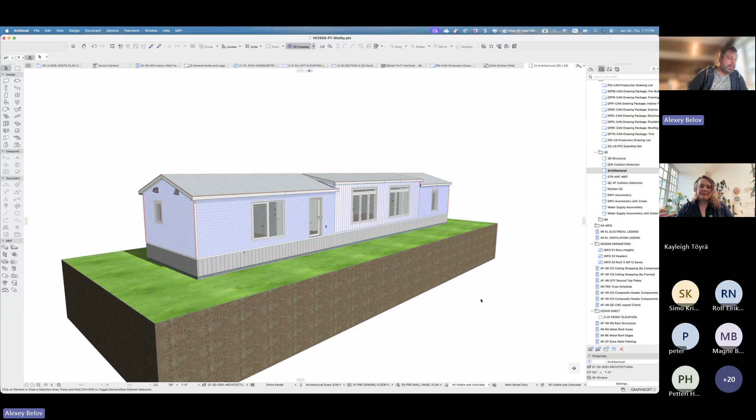And what to do, how to assign this information - of course we have layers, and at that time we were using layers. It was really terrible because even if you have only 2 boxes, you already need double the number of layers for management, because you have studs for model A, studs for model B, and so on. So we found another solution, and our solution is design options.

For example, this wall has an ID EW02. This wall has an ID EW03, exterior wall. This wall is also EW02, and this one EW02. So all of these have the same IDs. How can we distinguish them, and how can we get information?

Here we are coming to our global MOD, full MOD ID. This expression takes the model character - it just cuts the first 4 characters and assigns a letter, A or B - and it takes the story number. That's why this wall is B3 - it belongs to model B, which is on the 3rd floor. This wall is B2, definitely. This one is A3, I guess - correct, A3.

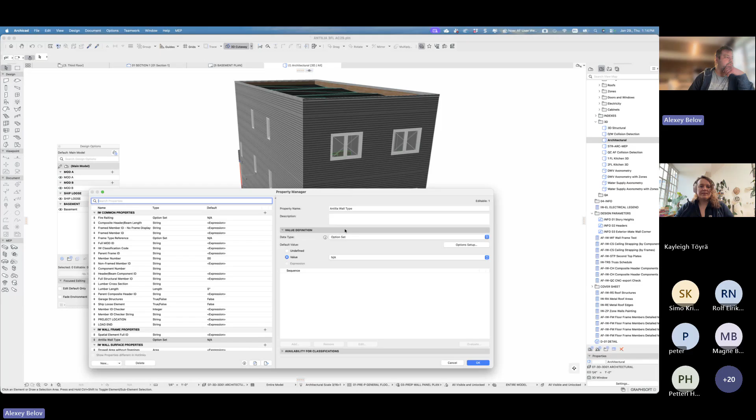And here's our first example of properties, as I told you, we have full MOD ID. So how does it work? Right now we have only one property for every type of house.

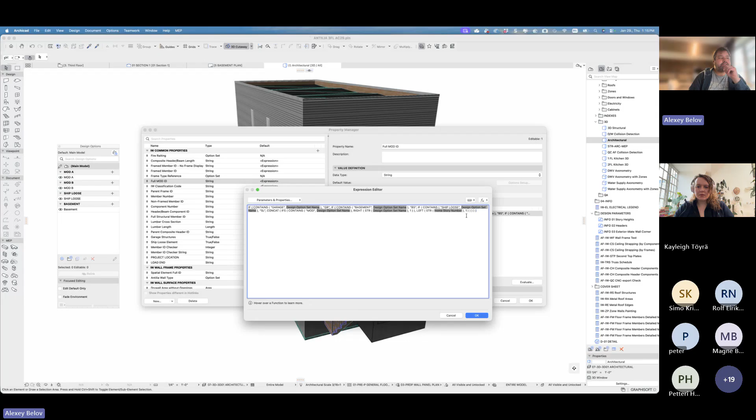If this design option contains a garage, it assigns GR. If it's a basement, it assigns BS. If it's ship loose - for example, in this house we have these parapet walls which are ship loose, stairs are ship loose, some exterior elements are also ship loose, we'll go closer to that a bit later. And if it's none of these three - basement, ship loose - then it takes MOD, as I told you, it cuts the first 4 characters, MOD and space, and takes a character. So meaning that for our wall here, we have an element ID.

The problem of element ID I'll discuss a bit later. And here we have this special element, full ID - it's B3EW03, meaning that it takes our full MOD ID, as I just explained how it assigns. Then it adds a dash and adds an element ID.

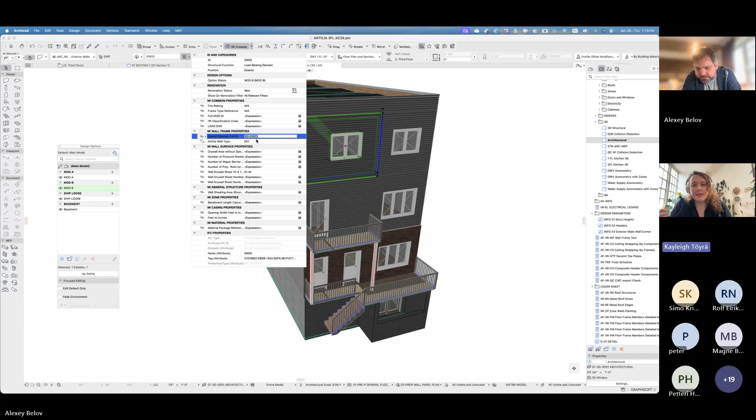We had a quick question or clarification: can you show the single module in Archicad as it is built in the factory, hiding everything else? Sure, of course.

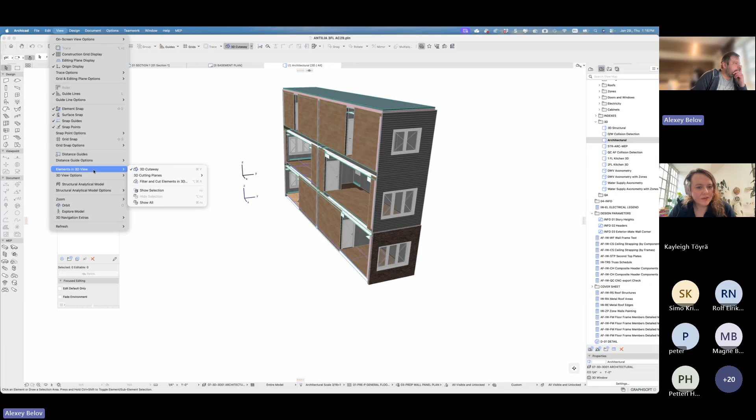That's going to be cool. And of course if you want I can additionally assign - okay, not a problem, give me a second. View elements in 3D view, filter and cut elements. Here we can use a range, for example first to first.

Just please keep in mind that this box looks quite strange for every architect. We've got this project when it was already designed, and this is not a finished project, it's a live project, and it looks quite strange because here we have a party wall. That's why we have to split these two elements. A party wall is sound rated and fire rated, so you should have two different frames, but at the same time we have to deliver it as a single module. So it's a very complicated story, and that's why later we'll talk about a different project, not this one.

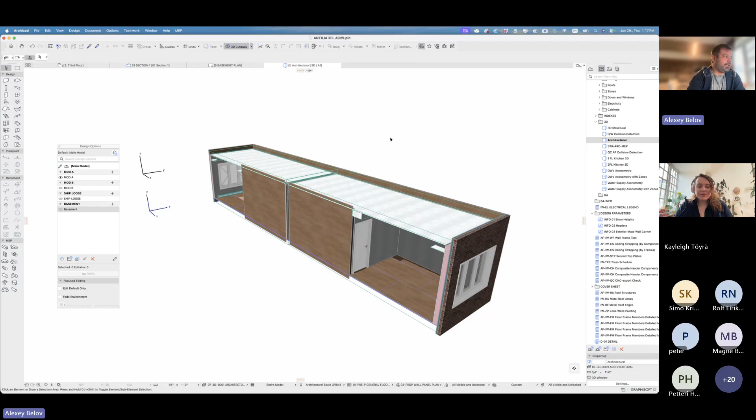But as you can see, yes, you can do that very easily. Let me just go back to architecture. Okay, here we have our elements. And just later in the summary section, you'll see how exactly it works.

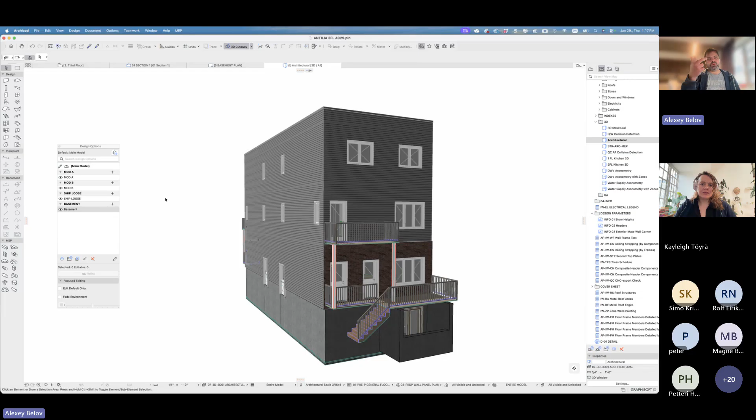So for our walls, we just need our favorites and we need design options, nothing else, because in favorites we already have our categories. Here, categories are not very important - I still believe that it's important, because if you ask me what's more important, a new feature in Archicad to develop a new level of IFC properties, or to add another option for nicer posts in railings - definitely IFC options.

So here comes the properties' magic, because in our ArchiFrame palette, when we start to create any frame based on an element, it can read element ID, element categories, and element properties. You can find this information in the documentation. It was our request to make a more flexible script for that, and it works.

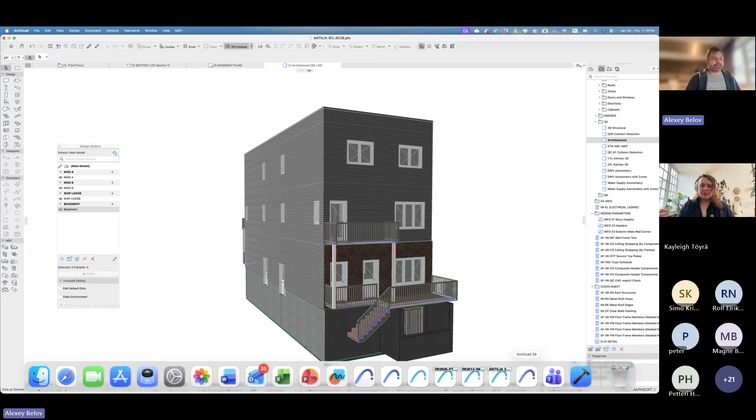So let's just leave this project aside because it doesn't contain any ArchiFrame elements right now - again, it's ongoing, I just wanted to show you how this structure works in the case of Archicad elements, the Archicad model. So the most important thing - our project here. Let's just get rid of our landscape, we don't need that.

And again, as I told you before, here we have wall EW02, and since it's module B, it will be a spatial element ID - it will be B1 EW02. This one will definitely be EW01, B1 EW01. Okay, this brings us to the parent, so-called parent element ID.

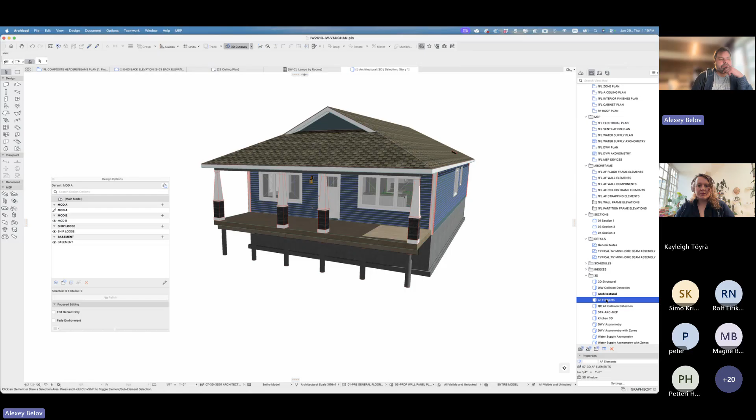Let me switch to ArchiFrame elements. I believe there's no need to explain how to create ArchiFrame elements, everyone knows that. So we have this element created based on an Archicad wall. And here, when we create this element, we have of course this assign IDs button, or give IDs button.

And it reads already the parent Archicad element, because I prefer to use parent element not for Archicad elements but for ArchiFrame elements. And here we have a script. This script has been created by Petteri. This is something really magic, really important thing.

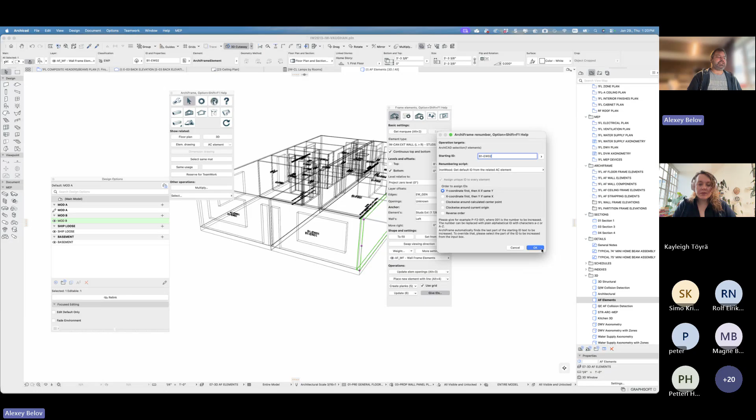It reads our wall information, and moreover, if, for example, I will change this wall ID, let's say that it's 11, and if I just select our ArchiFrame element here, give IDs, we can see that it's already updated, and this way everything inside this wall will be updated. You will see it a bit later.

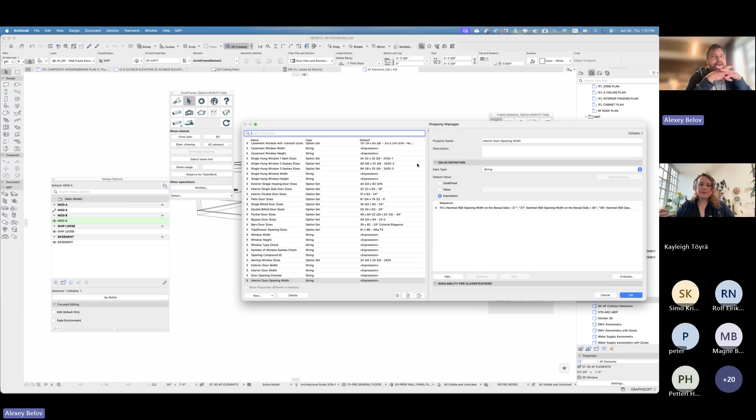Again, going back to our properties, because actually right here we have a very serious problem. Let's try to show. Just a sec. It's a bit complex project.

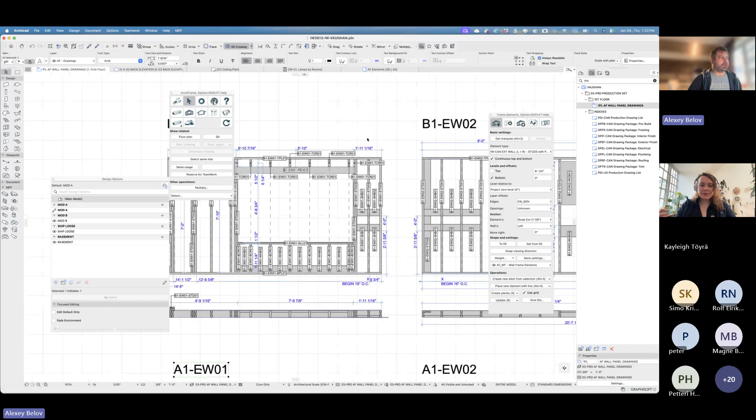So we have our elements, components, and my point, as I told you before, is to have information for every component. And this information should be very flexible, meaning that it should be updated immediately if I have any changes. And here's the problem. As I told you before, Archicad expressions work for every element, meaning that if I have my wall EW01, it's an element ID. And for a stud, I also need an element ID.

And this element ID should be unique, because we have to send it to CNC, and that's the basic rule for CNC management, meaning that you cannot assign an element ID 2 times, because again, Archicad doesn't support these parent ID assignments or spatial element assignments. That sucks. But we have what we have.

And here, what's really important, when Petteri's script works, it assigns these give IDs, it reads depending on the situation, because in mini homes we have only one model, in modular homes we have more than one model. It reads full mod ID. This is A1, B2, F3, and so on, and adds the second part, which is our element ID, EW01, EW02. So you have to type manually this Archicad wall element ID. Then the script comes into play.

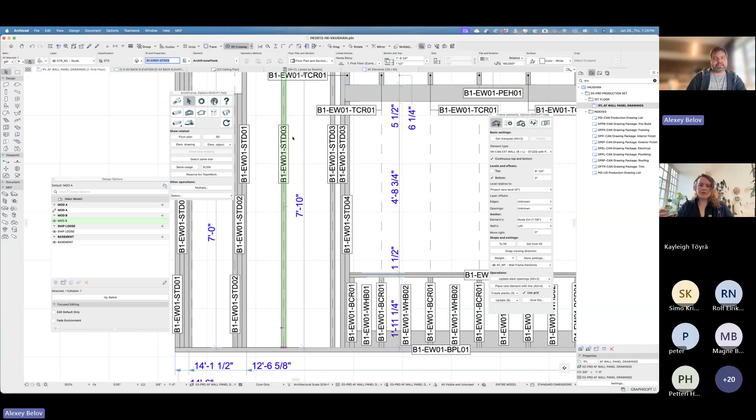Okay, but how can I get this information for my element as an element ID? Properties. In our properties, we have the so-called parent frame ID. How does it work? Again, mini home is only one model. I don't need a full mod ID for mini homes, but I need full mod IDs for modular homes. It checks if style of house is mini, it's project info. So we just type mini in our template.

Then it takes first 4 characters. If it contains a dash, because our ID is A1 dash, and then comes element ID. And take a look. First for mini. In mini, we don't have this part. So it takes EW01 and assigns it as a parent element ID to each stud, to each cripple, to each bottom plate, top plate, and so on. If it contains a dash in element ID, then it takes first 7 characters. 1, 2, 3, 4, 5, 6, 7. And assigns it as a parent.

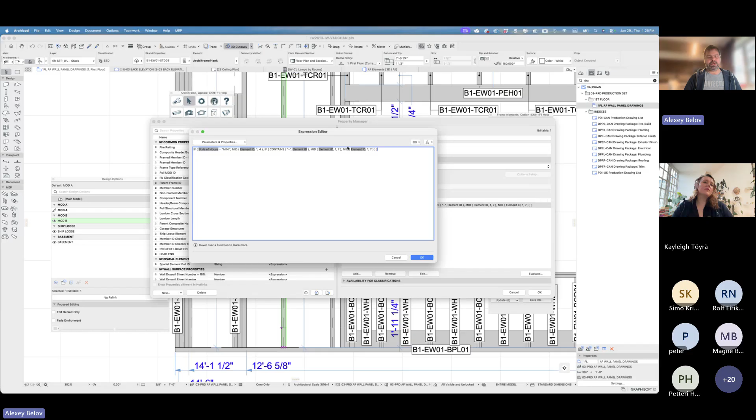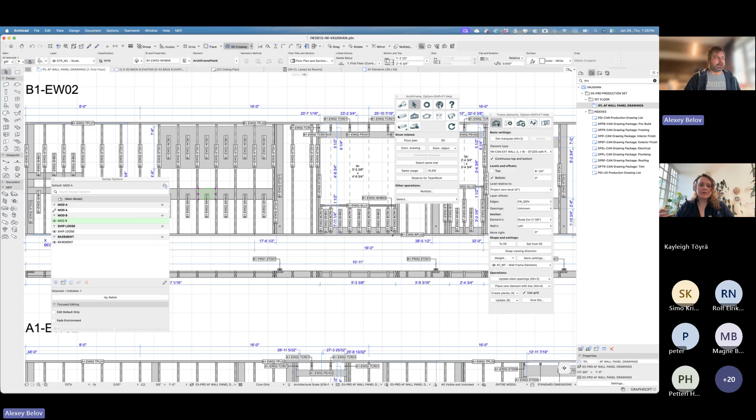This way, my stud, any element, or for example, kitchen blockings, I have to put some blockings in the kitchen behind this. Here we have some shear blockings in another frame. Just a second, we don't need it right now. So here, for example, these reinforcement blockings. Here, these are kitchen cabinet blockings because we have to screw our kitchen cabinets to every block, and so on. For our baseboard heaters, we need blockings.

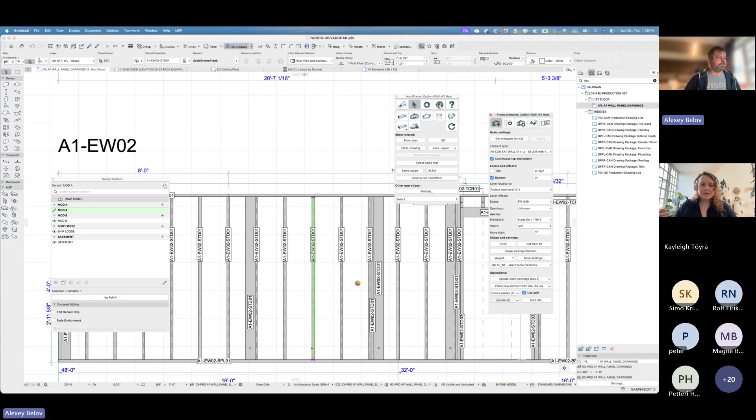And these blockings, again, know where they are. They are in our ArchiFrame element. And this element is EW02. Do you remember I updated our wall to EW11? It was here. I just didn't refresh yet. It was B, not A1. Sorry. Here. Every element has got a new ID. I have to do nothing here.

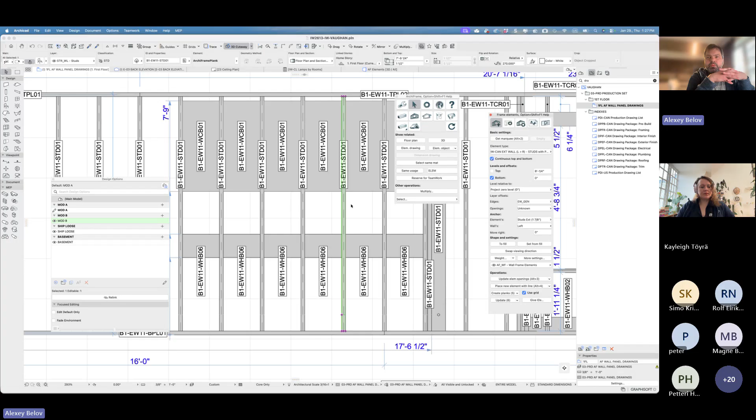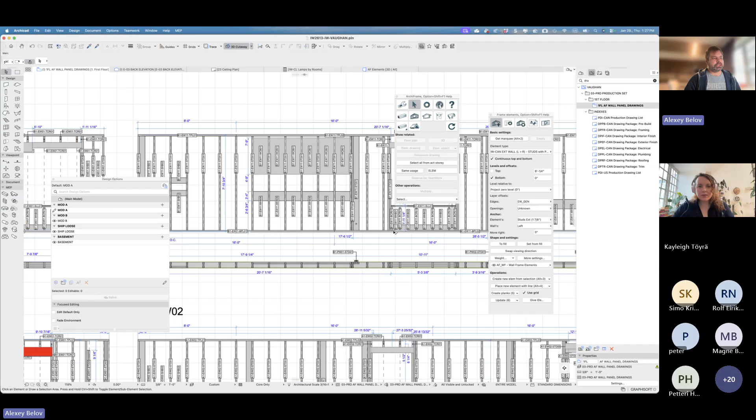Moreover, before we moved to a new facility, we were limited in our wall panels to 16 feet, meaning that this long exterior wall had to be split every 16 feet. That's why we had more than one panel inside one long panel. We still have this option, but we don't use it anymore. Right now, we can just assign bottom plate 01, 02, 03, and so on.

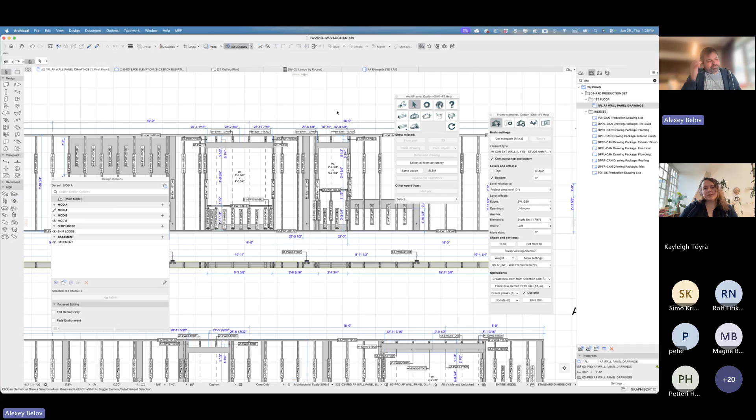But you still have this option just to assign a different element ID, and then you can still have your special, like EW01, 02, 03; they are all inside one ArchiFrame element. It's still possible. Right now we recognize that as an already obsolete function for us, but it was important.

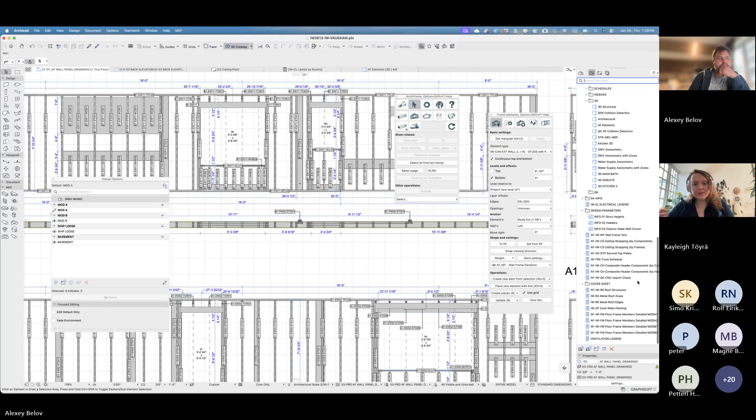Okay, next. As I told you, we have this parent element ID, but we can also have non-framed elements. For the best examples, let's just jump to our structures. You see, rafter fascia, weather blocking, some other elements, second top plate. The second top plate is not a part of my wall. It's a non-framed element, because first we put our elements, then we place it on the top, the second top plate. So, non-framed elements.

That's why we have the so-called full structural member ID. This full structural member ID just checks for different properties: framed member ID, non-framed member ID, which I already explained, like rafter fascia or second top plate, and no frame display.

A good example, again, is this house with only two models. I have only one wall frame, floor frame. I have to save my space, because I don't have much room for my joists in the drawings. I don't need to display my model. In this case, I can just display without the model, so it's a very simple trick with the properties. And header beam component ID.

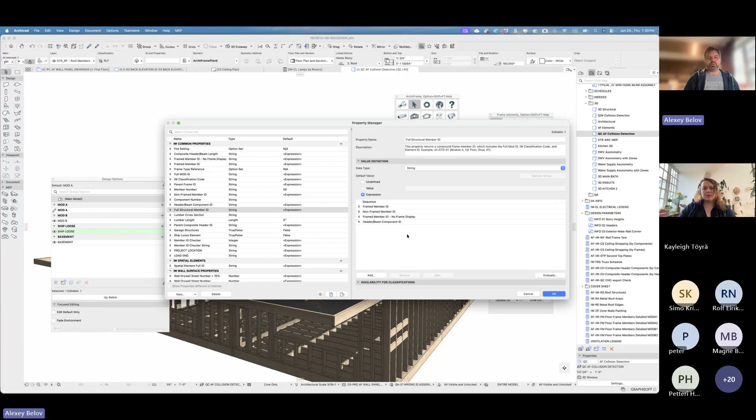Next week, we are starting with Petteri a new project that will allow us to automatically populate our headers with lumber components and plywood components, because we have composite headers, meaning that it's actually a frame inside the frame. You have a wall. A wall is a complex element; it contains a lot of members. Inside that, we have our header. And this header is also a complex element that should contain more elements on another level. But at the same time, I want to know that this lumber component goes to this header, and this header goes to that wall, meaning that it's a bit more complex.

Okay, here, for example, you can see these headers. I left them for some reason. I will show you how these elements work a bit later. And of course, to manage our elements, we have really extensive information. You can see our list of materials for walls, for roofs. Moreover, we are working not only in Canada; sometimes we are still working with the United States. And it requires different plywood thickness and other different materials, meaning that we need a really serious list.

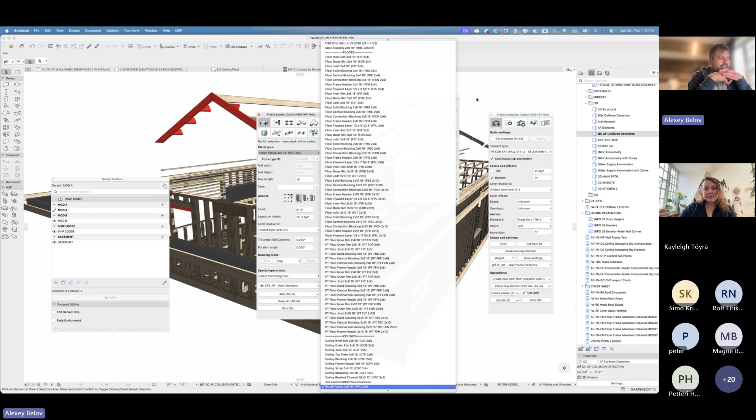That's why, guys, if you join me in asking to finally create for us at least foldable, unfoldable lists for folders, be my guest. I already love you, because it's been our request for a long time. It's really difficult.

But why do we have such serious lists? Because we are using our ArchiFrame plank XML not only on a very primitive level that only contains geometry, max length, and so on. No, here you have properties, and in a second I will show you we have our own classification system, because I'm not satisfied with the Archicad classification system. It has been added to Archicad just as an example, but you have to use some norm, or you can create your own. We have our own. Plus, it manages a lot of things that come from your plank library part object.

For example, it instructs to show or not show lines, this X symbol, because here you can see it's a top cripple, meaning that I don't want to see these cross-section lines in the floor plan. It also defines drawing index, meaning that when you have created your top projections, they won't be hidden by accident by top plates that are also displayed. You can set this. It, of course, assigns layer, and as I told you, it assigns classification. Plus, it assigns textual properties.

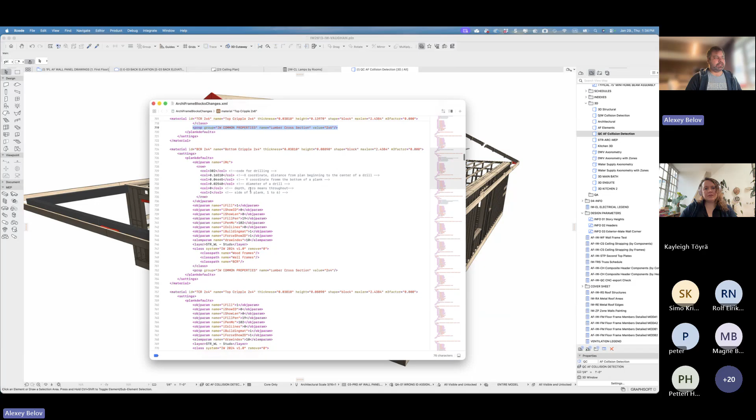Okay. So again, it's much more complex. It takes time to set up these elements, but this way I can immediately get the frames that I need. Now you will see. I told you about this full structural member ID. And you can ask a question. Let's check it here.

If you are still following me, you can ask the question: why do I need full structural member ID if actually I've got this full mod structural member ID based on element ID assigned by ArchiFrame? It's a kind of reverse engineering, because yes, the first part that I have is a parent ID, parent frame ID. Yes, it takes the information from the element, but also we have the second part,

which for this stud is STD01. And this STD01 ArchiFrame assigns automatically based on our classification. As I told you, we have our own special classification. If we go to classification manager, you can see that here we have our special elements. We have our wood frames.

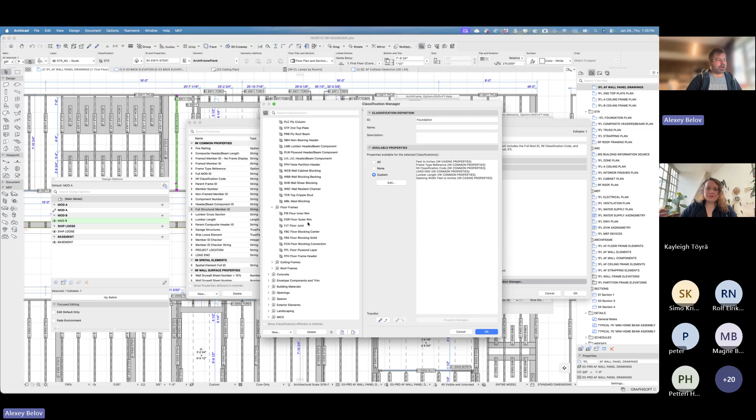For wood frames, we have a description for every type of element, like wall cabinet blocking, wall shear blocking, mast blocking. For floor frames, we have floor inner rims, floor outer rims, floor joists, and so on. So a lot of things we have to assign. And for example, ArchiFrame right now cannot work, or already can work, actually I don't care at this moment, with cripples. It assigns cripples as a stud, just of different element ID or different length.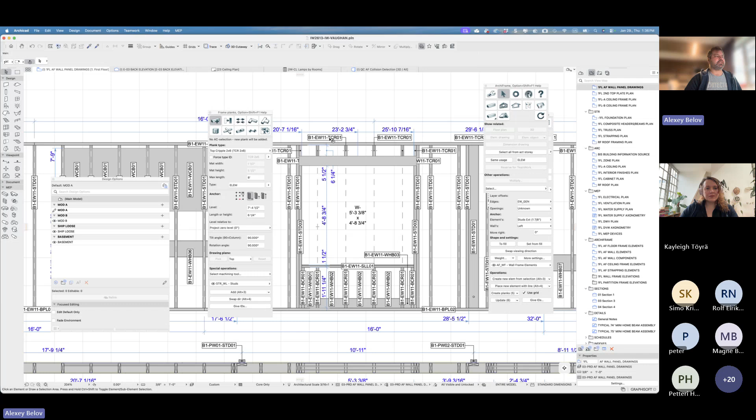And what will happen here? By default, when I create this wall, it won't be a cripple, it will be a stud. So I will just create for you the situation I get when I have created these drawings. Here it will be a stud. Ba-bam! These elements became red, so they are studs. And you can see here that it displays stud.

But it's not a stud, it should be a cripple, because I want to have it as a cripple, because a cripple has different settings for call lines, different settings, and it can even be produced out of different lumber, maybe not premier lumber. And in this scenario, it became red. Why? Because we have one more property called member ID checker. It's a very primitive property.

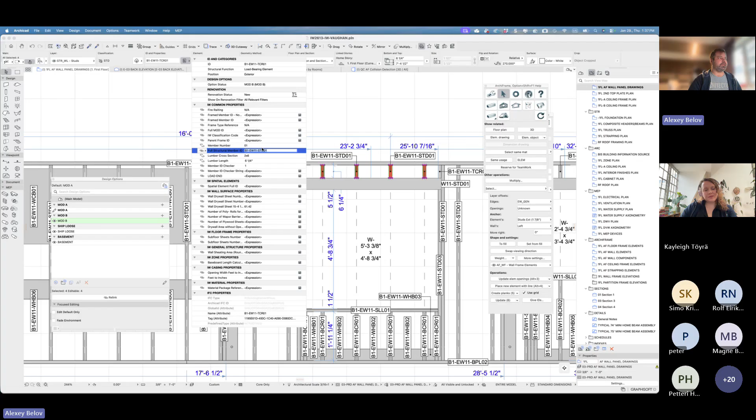It just compares two fields: this field, ID, that has been assigned by ArchiFrame, and full structural member ID. And you can see they are not the same. Here I have the parent frame. Yes, it's still the same, it's B1 EW11, but here it's TCR, top cripple. Here it's STD.

Meaning that if I see this red, all I have to do is press the update button. ArchiFrame will reassign information based on parent frame IDs, and that's it. Now it's a stud. So right now I just show you how it comes to me from the beginning. Originally, it comes as a stud. And when I see these studs, I just have to select them using find select, or manually. I prefer manually because it gives me some time to think.

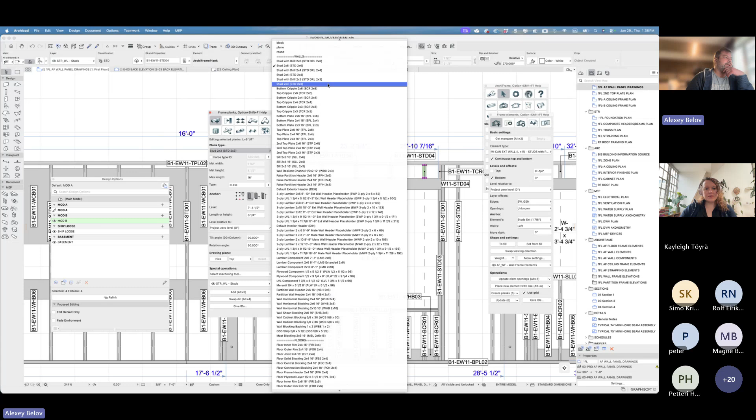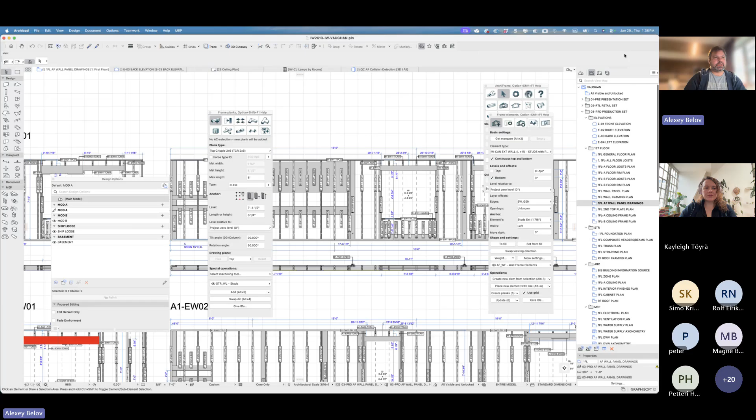And here I just have to assign this top cripple and update. And that's it. Plus, this works not only for our framed elements, but also for non-framed elements, elements that don't have any assignment. Let me go back to our QC. We have it here. I left these elements red for you.

So it's a roof fascia, and this roof fascia, you can see, doesn't contain any element ID. But since the classification is roof fascia, we have full structural member ID, which is SL, ship loose, it's modular, and you can see here it's ship loose RFC 06. But in element ID, I have nothing. Again, just the update button, and the red color will disappear because ArchiFrame will analyze this element and assign the information I need.

We had a request as well in the Q&A about being able to see the engineering bill of materials, so the output of what will come out of Archicad and ArchiFrame. Yeah.

So right now it takes some time because of the overall performance. Yeah. I have 3 Archicads plus the broadcaster.

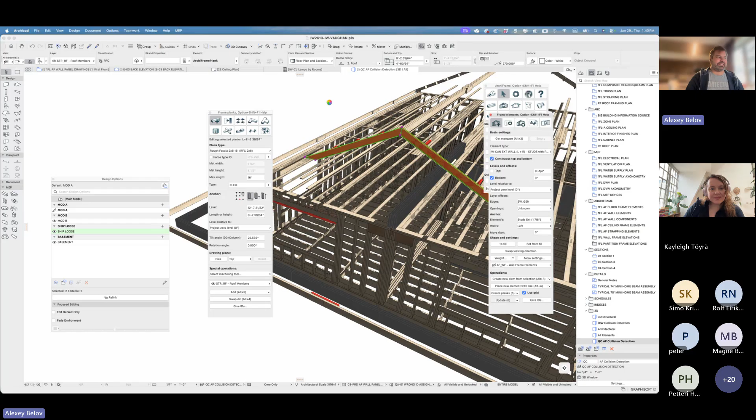Okay, anyway, you can see that, for example, here we have these blockings, and before starting the presentation, it looks like my Archicad just got frozen. So here we have wood, here we have red, just because as a test I checked that. No, now it worked. Again.

Oh, sorry. My bad. Yeah, since it's not a part of frame, I have to use not update here now. First, I have to give IDs. That's why ArchiFrame cannot understand what I want. So here, when it will be unfrozen, I'll just have to click this Give IDs button, assign IDs and then update.

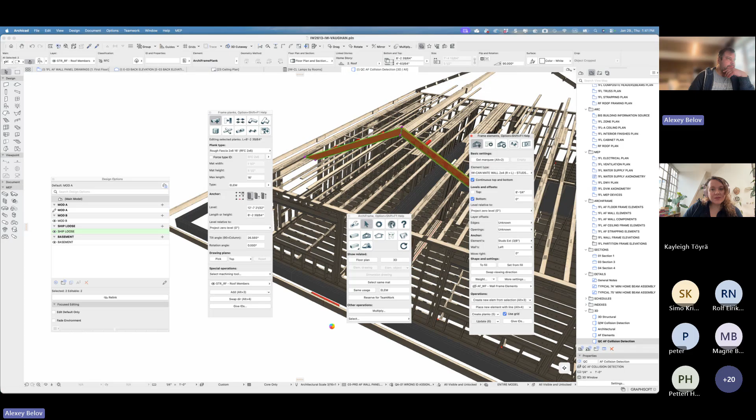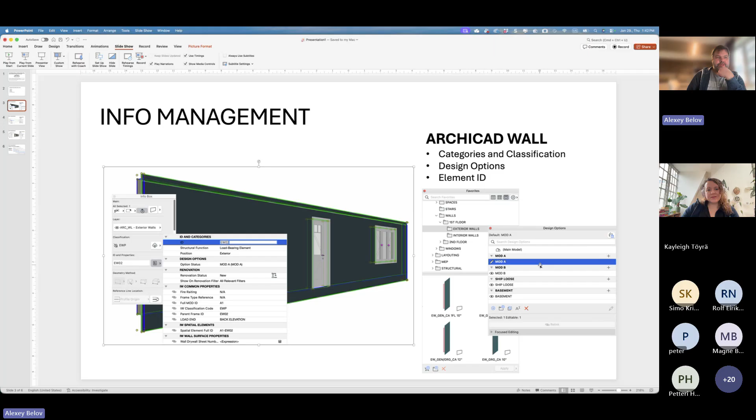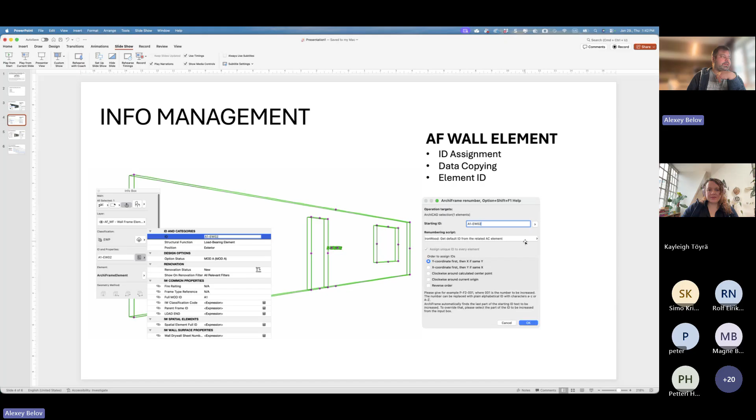Again, the summary. As I told you before, first, Archicad level. We have our wall. For this wall, we use two things. We use favorites that assign categories and classifications. We use design options, and we assign element ID manually. Then it transfers to ArchiFrame element, wall element, or floor element, or ceiling element, doesn't matter. And here we assign this element ID, and we have this renumbering script. This gives us the information.

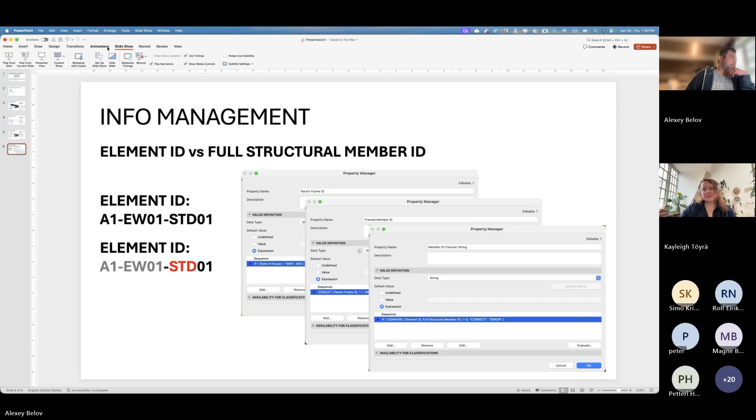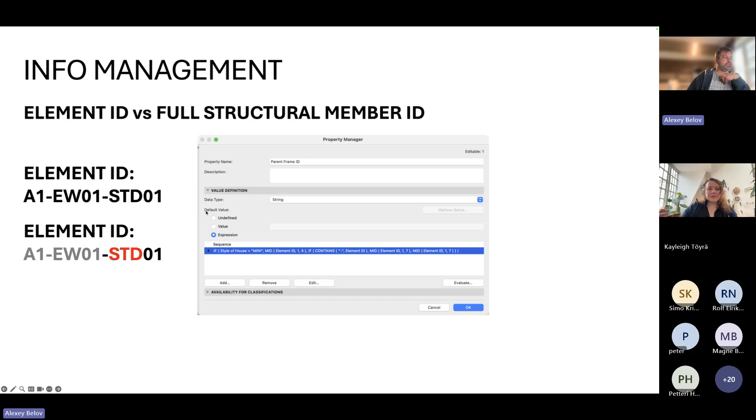So again, exactly what I told you right now. Element ID here is A1, EW01, STD01, and here element ID, which is actually full structural member element ID, STD01, is analyzed by expression. So parent frame ID, the first part, then framed member ID, which is this part, and then member ID checker. It just compares element ID and full structural member ID. If it's 0, meaning that they are equal, it's correct. Otherwise, it's error. If it's correct, it has its own surface. If it's error, it gets red surface.

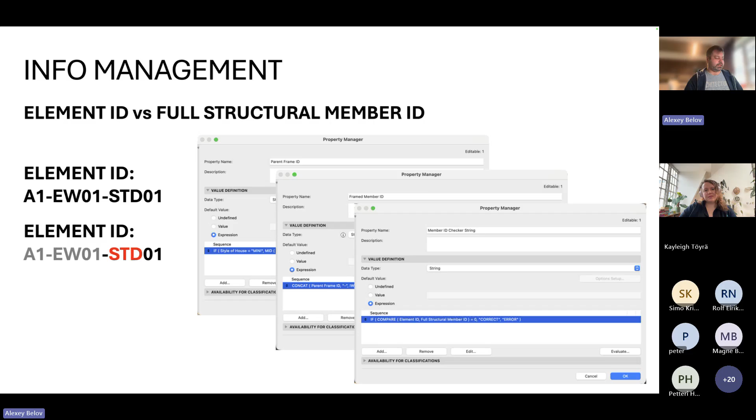Do we have unfrozen Archicad? Yes, we do. Wow. Okay, the last attempt. Now I will be smart. Okay.

That's it. And now if I press update, right now it's RFC01, it will get also RFC01. Probably Archicad will also need some time, but you can see it works. It will be 01 and 01 everywhere. Or if we have more selected roof fascia, then of course it will compare their lengths and will assign these last numbers, which are member ID, based on their lengths.

Of course, this development took some time. It required some additional investments because it's something very special that Petteri made for us. And I really love this man because he's a magician. He creates wonderful solutions. And in case you really want to automate your production, if you want to get more information, maybe it's a good idea for you to turn to Petteri to ask him to tailor some solutions for your company.

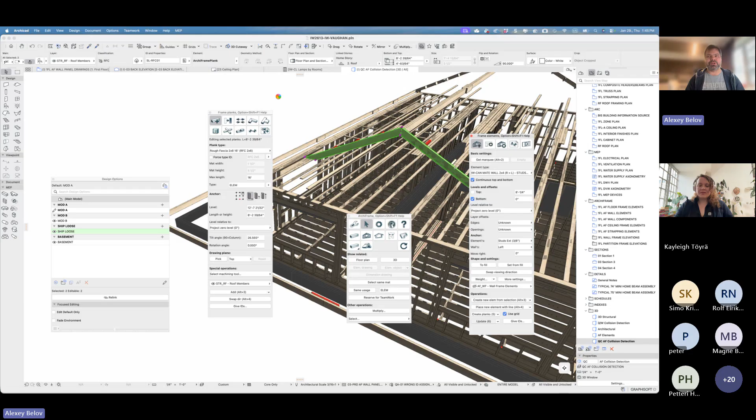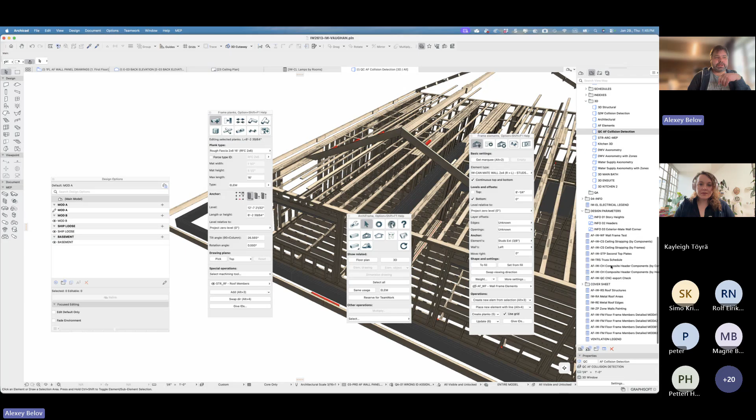So, for example, I will not share this template or this classification because it won't work for you. It will work for us as a company because it pays attention to our needs. Your company will have different requirements and need different information. But based on that, I'm pretty sure that Petteri can provide you with very serious information. Also, it will give you really correct schedules and so on. Like, for example, of course, we have our schedules for strappings.

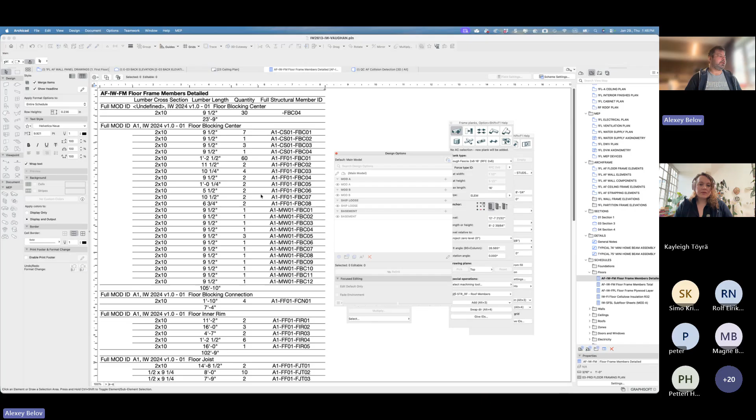It's not here. In schedules. So, for example, for our floors, we have detailed schedules for our floor blockings by modules, or we can have total information. Of course, the total information doesn't contain real lengths, because of optimization, you know, this is a so-called bin packing algorithm.

Archicad doesn't support that. ArchiFrame doesn't need that because actually this information can be provided, and this job can be done by Cambium or Hundegger or other software. So it's called trim optimization. So how much wood do you need? Not exactly, but really need in stock to produce this number of lumber pieces.

Okay, maybe it's a good idea to ask Petteri to connect and maybe add his 5 cents. Yeah, Petteri, would you like to add anything? I know you need to leave a little early, so jump in now. And then I've also got some other questions as well to go through. But yeah, go ahead. Yeah, okay.

Well, first of all, thank you, Alex. It has been a pleasure working with you, adding these new features like maintaining the properties, the design options. For example, what we didn't have 1 year ago: when you cut one plank into 2 pieces, the new part didn't inherit these properties, design options, classifications, categories. That was something we added with this project we did for Alex and Ironwood.

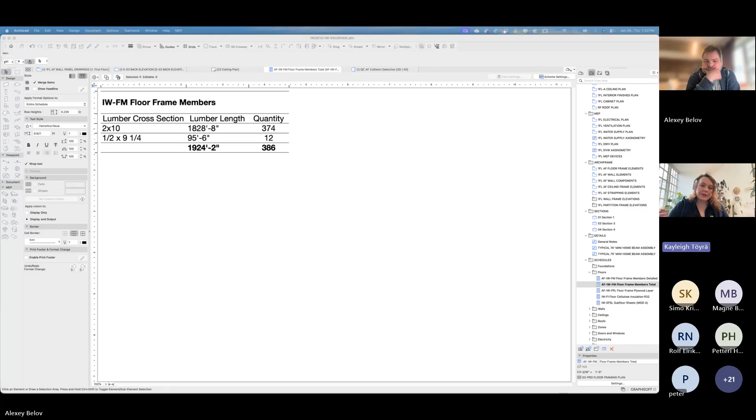Yeah. We had also some other questions. The bill of materials, I don't know if we have time to quickly go into that at all, but also just the process of tailoring. So working with Petteri, this was a very collaborative approach as well, wasn't it? You visited, you made some requests, and it sort of deepened from there. Anything you can add to that?

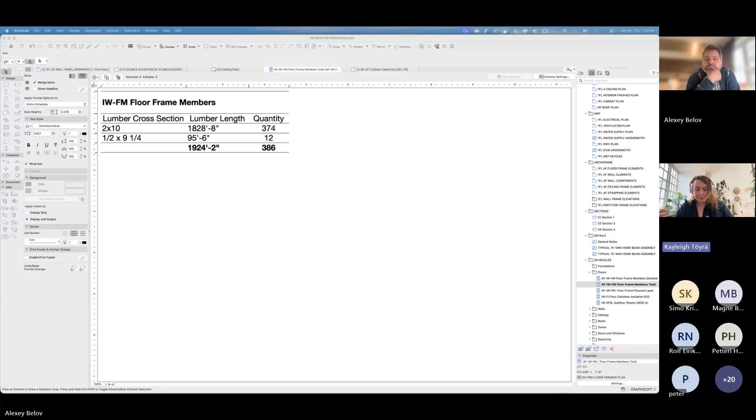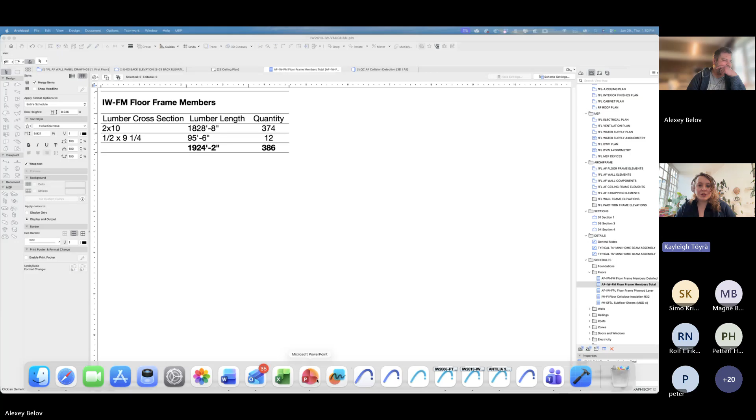I got it. So actually, yes, I will be happy to help you, because of course you have a lot of questions, and sometimes it takes time to analyze and to work with properties. And again, the properties, that's why I told you that I will not share our properties with you. I can show how it works. I can explain to you the mechanism, but first of all, it's our know-how. And second, it just won't work for you. You need your own properties.

I will be happy to help you with that. I have some experience with properties, with library parts development. Just a very quick explanation, a very quick example. For example, we have our own pocket doors that work properly, and they define your core.

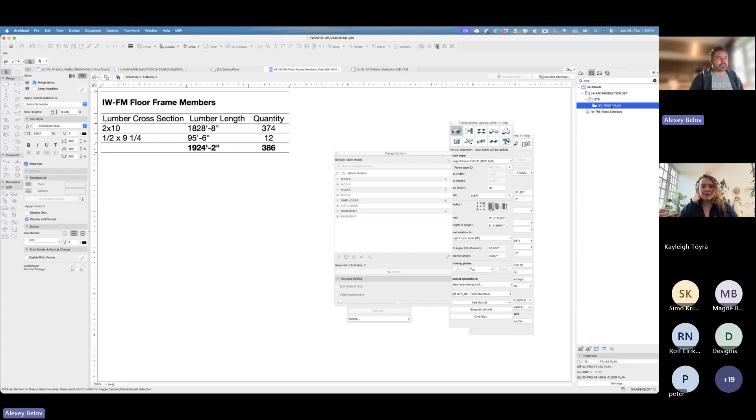Thickness that Archicad doors do not have, or for example our truss object that you can see here, our trusses update information automatically and they add automatically trusses. For example, if you have to move some truss, you can move it this way, you have additional truss, and automatically you will get more trusses.

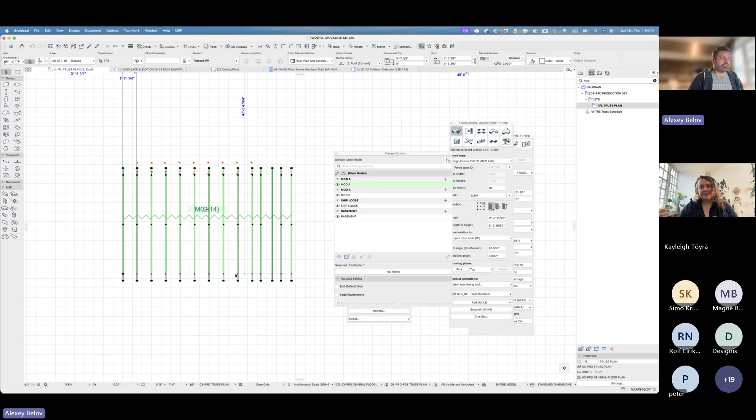Like for example here you have a fan or a diffuser or something else in this case, but you have to keep your distance like 16 inches between trusses. This way you can move your trusses only this way, and automatically here you have 15 trusses. It was my development and so on.

And it's okay, it's correct. It's like you have inside your Archicad out of the box your template, but as a BIM manager, I can tell you this template is just an example. No normal design firm will use this template, because it just shows you what you can do, but you need your own template, your own developments, and this template will never be finished. You will have maximum your template 95% done, but every time something new will come.

It's a work in progress. The template is a suggestion.

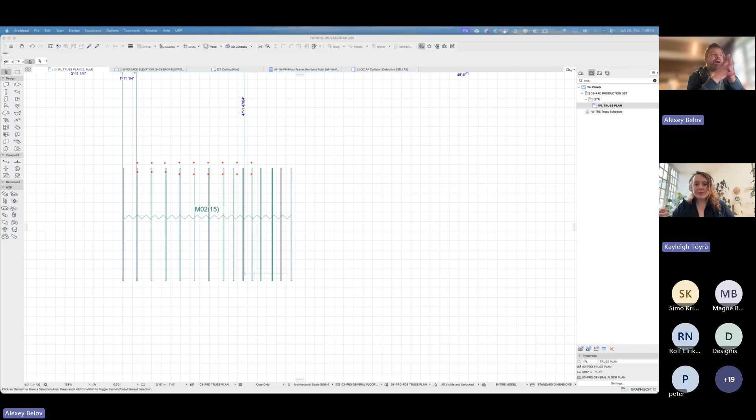I hope that this information, especially the last part that I showed you, didn't blow up your mind, didn't explode your mind, because even my team members sometimes cannot understand how exactly these properties work. I have to connect to another teamwork project just to check and understand. And yes, I know it's complex before you start to use that, but when you understand how these properties work, it's very easy, very primitive. It looks like it can scare you, you can be afraid of that, but if you start working on this, it's not very difficult. You will see your way.

And it'll make life a lot easier as well.

Just a last important moment. I have to tell you the truth, I'm a very, very lazy man. I don't want to draw something 20 times, 25 times. I don't want to check any element ID or update these element IDs manually if something has changed. That's why for me it's much better to spend a few days, maybe a few weekends, some free time just to create another library part or set other properties, but to make my computer work for me. Because again, let's be lazy, let's make your computers work. You have much more important tasks than to update manually and keep your eye on every ID. This should be done automatically.